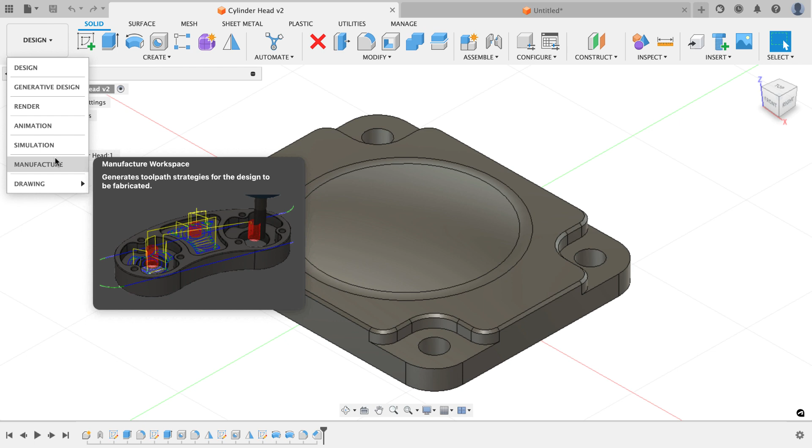I'm going to switch over to the manufacture environment. When I originally did this series, I uploaded a tool library for all the parts in the series. I'm gonna attach a new tool library to the description of this video, which is just a link to the OneDrive folder that I'm using. And I made a small tweak to one tool.

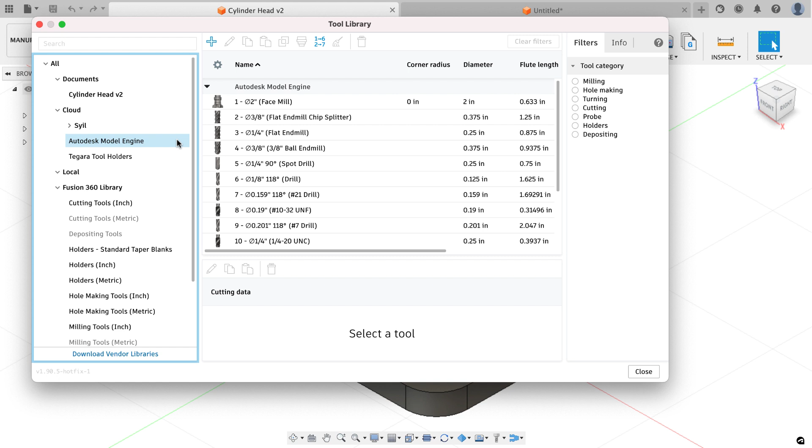Now, you can either download the new tool library, or if you wanna make the change too, what I did is I went to my tool library, and for my Autodesk Model Engine, I found my 3/8 inch end mill, and I changed the aluminum finishing toolpath. So if I edit the tool and go to the cutting data tab, if you find the feed per tooth for aluminum finishing, I changed the feed per tooth from 3 thou per tooth to 0.002 inch per tooth, which changed the feed rate from 60 down to 40.

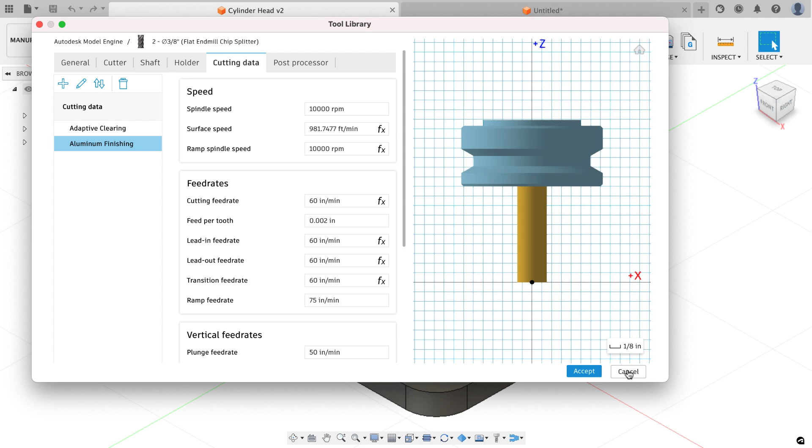I just wanted to slow the tool down a little bit to help improve the surface finish on my 2D contouring operations. So that's the change I made. You can either download the library or edit this tool and make that same change if you're interested in following along with what I'm doing. I'm gonna hit cancel and close, and now I'm ready to start adding my setup for this part.

I'm gonna make this part out of the same stock. It's gonna be roughly 2.5 inches in the X, 2 inches in the Y, and it's 1 inch thick. And when I create my setup, I'm happy with the work coordinate system, I'm gonna leave it at the top dead center of the part. It already found the body that I wanna model. What I'm gonna do now is move on to my stock tab.

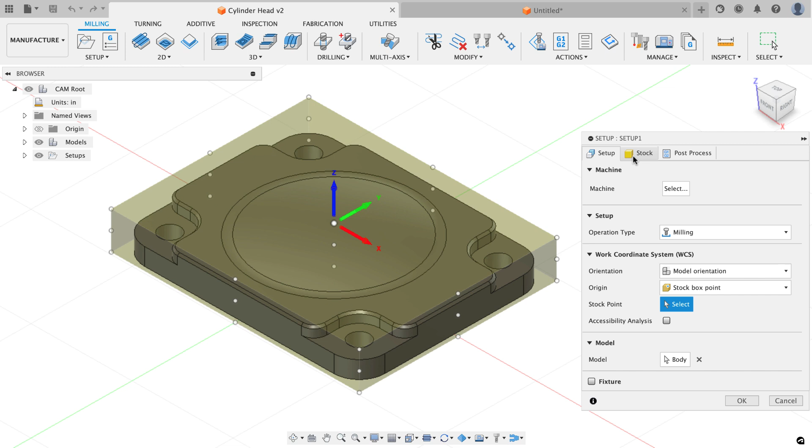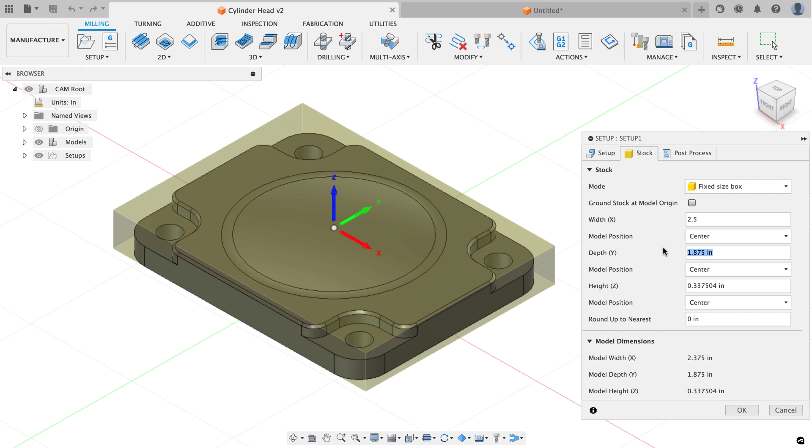On stock, I'm gonna change my mode from relative to fixed size box, and note that I have no additional round up. Here I have that set to 0. So that tells me that my part is only 0.337504 inches in thickness, and I'm cutting this out of a 1 inch piece of material. So let me add my sizes. I'll say 2.5 for X, 2 in Y, and for the Z, 1 inch in thickness.

When I look at this from the front, you can see I've got a lot of material to remove, and I could split the difference, or in my vise, I have gripper jaws that hold the material extremely securely. So in the first operation I'd like to remove as much material as possible, so that when I flip it over and put it against parallels in the smooth side of the jaws, where I'm not holding it as securely, I don't have as much material to take off in that setup.

So I'm gonna adjust my Z model position. Normally you see me do this from the top with a 10 or 20 thou offset. In this case, I'm gonna do it from the bottom, and Fusion figures out the exact number to keep the part centered. On my gripper jaws, I need about 1/8 of an inch of clearance between the shelf the part sits on and the top of the gripper jaw, but I'll give myself a buffer and say 0.2 inches. That's what I'll take off in my second operation, and the shear hog will handle 0.2 inches no problem. So I'm happy with that.

I'm ready to look at my post-processor tab, and there I have my work coordinate system set to 1 by default, which gives me a G54 out in the machine. So I'll hit OK, and I'm ready to start adding toolpaths.

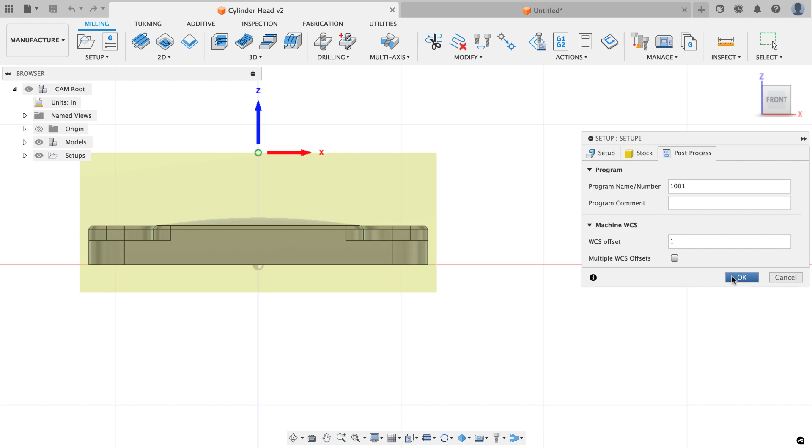So I've applied the CAM toolpaths, I have run the part at this point, and I went back and started editing the CAM video and the machining video, and I realized after running the part that I made some mistakes. I was going to go through and point out some of those mistakes, but I thought it might be a fun game. Who can go through and spot the mistakes that I made?

I'll tell you one of the mistakes that you might notice is for this spiral toolpath right here. I programmed this entire part but didn't save it. Later on, an application on my computer crashed and it took out Fusion as well, and when I opened the file back up, all my toolpaths were gone, but the video footage was recorded. So I went through and quickly reduplicated everything and did setup 2 and 4 after that.

However, when I applied the spiral toolpath, if you note in the video, on the fourth setup, if you look at my spiral, it goes from the inside out, which would be bad. But if you followed along the steps that I did for the first setup, it's going to go outside in, which is what you want. So that's an example. I'm curious to see what other things you guys can spot as you watch the CAM and then the machining video.

I now return you to your scheduled CAM broadcast.

One of the things I often see people do with parts like this is they just go with the de facto, I'm going to face the part. And I don't see any reason to face this part because there's no flat face at the top of the part anyway. We got the dome shape. If we face this part, we're only going to take a few thousandths off and we have a long ways to go till we get to the finished part face. So instead, I'm just going to rough the whole part out by going to the 3D menu and selecting adaptive clearing.

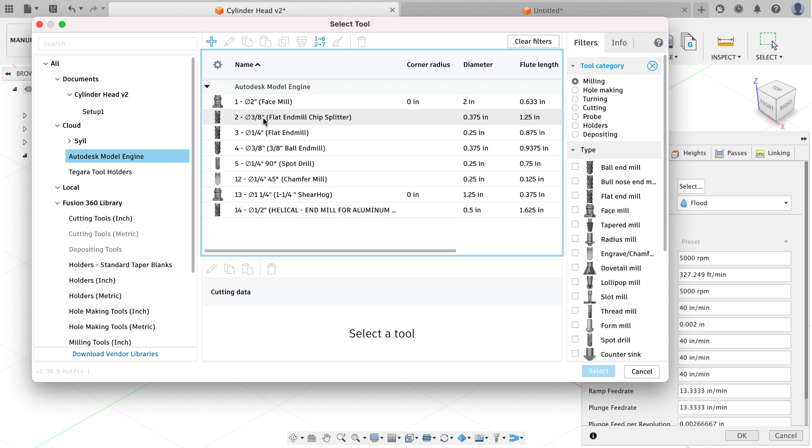I'm going to grab a tool from my library, and the tool I'm going to use is the one that I just modified, tool number 2, the 3/8 inch end mill, and I want to select the adaptive clearing preset. For my geometry, if you remember in my last video, I talked about nothing means everything. I'm not going to select anything for geometry. I'm going to let Fusion figure it out. Fusion knows what the stock is, the model, and the tool, at least for 3D operations, and it's going to be able to figure out what I want to machine. I'll move on to my heights tab.

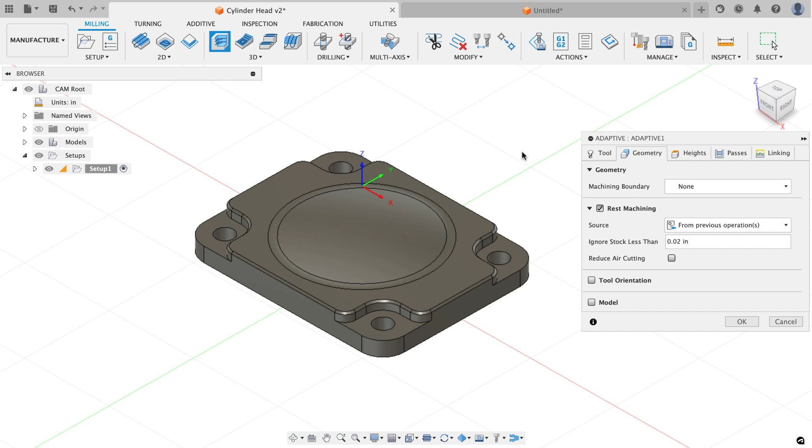On my heights tab, I'm going to start cutting from the top height of stock top, and I'm going to cut all the way down to the model bottom, but I want to go 20 thousandths of an inch past the bottom of the model for when I flip it over so I don't have any height mismatch. Instead of typing 20 thousandths here though, I'm going to type in minus 0.03. And you'll see in a second why I decided to make that change of 30 thousandths when I told you I only want to go 20 thousandths past the bottom.

I'm going to move on to the passes. I'm happy with the optimal load. I could probably increase the percentage of step over based on watching it cut the cylinder now. That was the first time I'd ever used this tool, so I was a little on the conservative side. But it's going to go pretty quick. It's a pretty small part, and I think I'm going to leave that optimal load right where it is.

If I move down to my maximum roughing step down, the tool is going to need to go roughly 0.82 inches deep to machine what I've asked for, and that's a little outside the 2 times diameter rule that I go for. We might be able to make it work, but I'm just going to split the difference a little bit, and set my maximum roughing step down to be 0.42. I just want 2 step downs in this part.

When it roughs this dome, it's going to leave kind of a terraced effect on it, and for the terrace I just want to make this a little bit smaller, so I'll say 0.03, and that'll just leave a little bit smaller notches for the ball mill to come and clean up. Do a couple more things. I'm going to turn on something called order by area.

I want the tool to do all the work it can in one spot before it moves somewhere else in the part if possible. And then I want to leave some radial and axial stock. I'm going to set my radial to be 0.01. And when I do, you'll notice that the axial follows along at the same time. This is why I went 30 thousandths of an inch below the bottom of my part, because I'm asking the tool to pull up 10 thousandths of an inch everywhere, including on the outside boundary of the part.

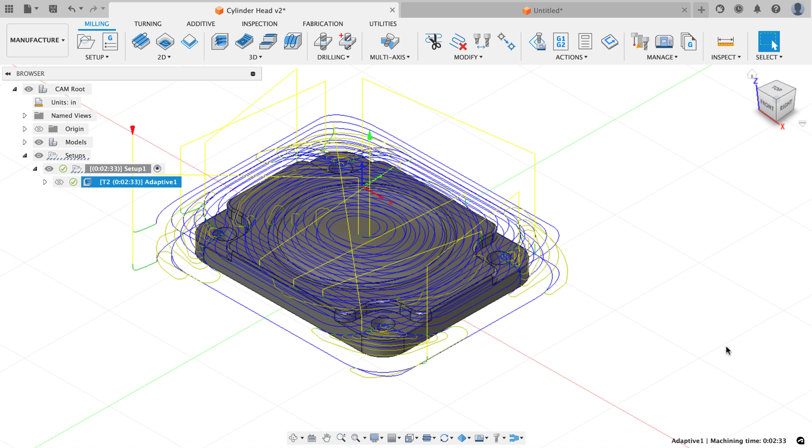And the thing I'm looking for is I just want 2 step downs. I don't want to see 2 small step downs at the very bottom of the part. I just want to see 2 primary step downs. If I go and I simulate this, I'll make this go just a little bit faster. We'll see that it just starts decking off that bit of material from the outside in, and then it's going to step down and rough out the rest of the part.

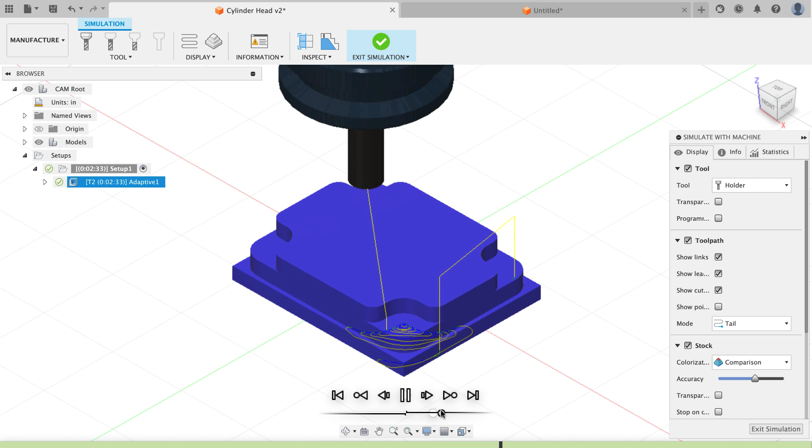We're looking at a cycle time of roughly 2.5 minutes. When we do the video, you guys will have to pay attention to how close that estimate actually is for what it's doing. And now it's doing the little step ups. It's going to take that material off, and you'll start to see it work on the dome and removing material so that the ball mill doesn't have quite so much that it has to remove. So there's what my part's going to look like when it's done with the roughing operation. I'm happy with that. I'm going to exit my simulation.

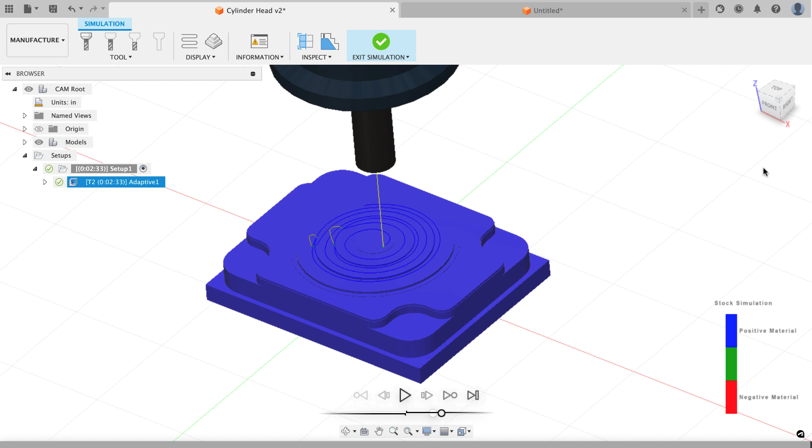And now what I think I'd like to do is add a finishing pass around the outside perimeter of the part. To do that, I'm going to select 2D contour. I'm going to use the same end mill, but I'm going to use the finishing profile that I chose. Instead of going and selecting the tool and choosing it, notice that there's a preset field right here that I can drop down, and I'll say aluminum finishing, and I get my 2,000 feet per minute and my 60 inches a minute.

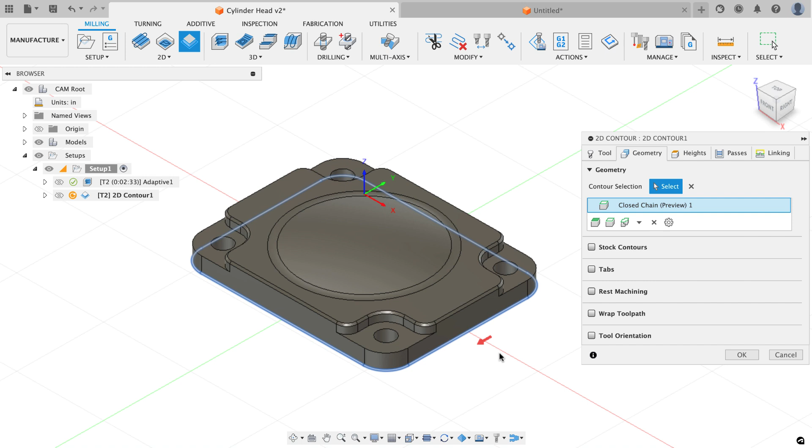For my geometry, I just want to grab the chain of geometry at the very bottom of the part. And for my heights, I'm going to cut down to the selected contours, and I'm going to go negative 0.015. I won't go quite as deep, just by a little less, and that'll cut past the bottom of the part and finish that entire face. On the passes tab, I think I'm happy with everything here. I have my finishing overlap already set. I have my feed rates.

I'm good with that. On the linking tab, I'm gonna set my lead and sweep angle to 0, just like I did on the cylinder. I'm gonna uncheck use same as lead in for the lead out, and I'm gonna lead out at a 45-degree angle. And then I'm gonna choose my preferred lead in position, and I'm gonna use that same point that I did in the cylinder. So a lot of this is the exact same as what I grabbed in that cylinder. In fact, I could have probably opened that part and copied the toolpath off and just pasted it on here. I'll hit OK. And now I get a 2D contour that just cleans the outside perimeter of the part.

I left material on all the flat faces, and I could certainly go around with 2D contours or 2D pockets and do those faces one by one, but there's a more automated tool for that, and the tool I'm going to use for this is going to be 3D flat. Again, I'm going to use the same tool to do that. I'm going to choose the aluminum finishing toolpath for this, and now I just want to go over to my geometry tab, and what this tool does is it automatically finds any face that's horizontal and automatically machines it.

So that's going to be the top face and any of these pocket faces down here. It's not going to go any lower below the part because there's no flat faces down there, which means in the heights tab, I'm completely fine with it cutting from the stock top to the model bottom because it's only going to find horizontal faces. So I don't have to worry about it crashing into my vise or anything like that.

And then I'm also going to tell Fusion it's okay to machine over holes so it doesn't try to lift up over the holes it sees on these flat faces. So I think I'm okay with all the options that are there. The final option I'm going to do on the linking is to tell Fusion to do a minimum retraction. Just lift up as high as you need to, or as best you can so that you don't crash into anything. I'll hit OK. And now what we'll see is without selecting anything, Fusion will go and machine all the flat faces on this. Now there is a problem.

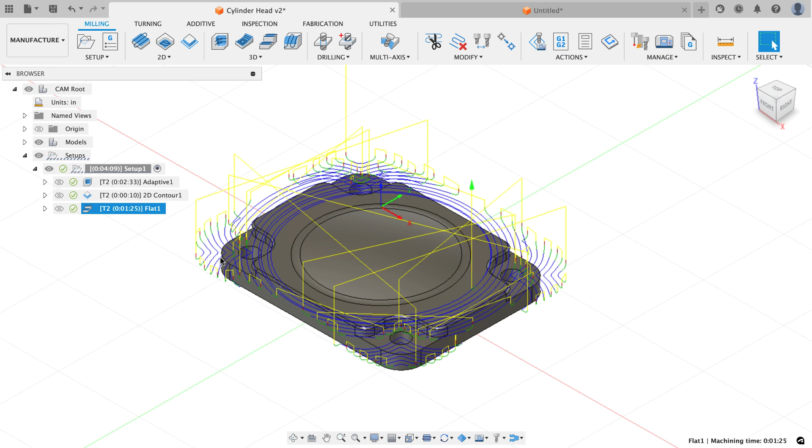It's using the finishing step over amount, which is way too small. So let me edit that. I'm just going to go over to the passes tab, and there's where my step over value is. If I want, I could just go and say reset to system default, and that's what it would have chosen if I didn't have a preset already set for this tool. I'll hit OK, and now we'll see a new toolpath that has much larger step overs calculated, and it should appear on our part much faster.

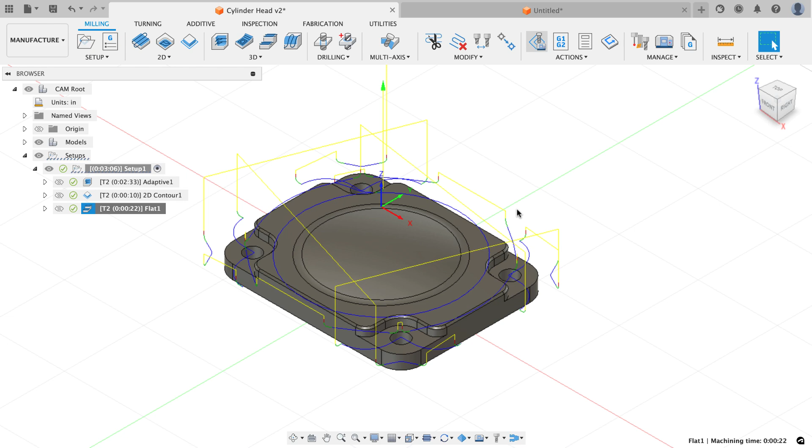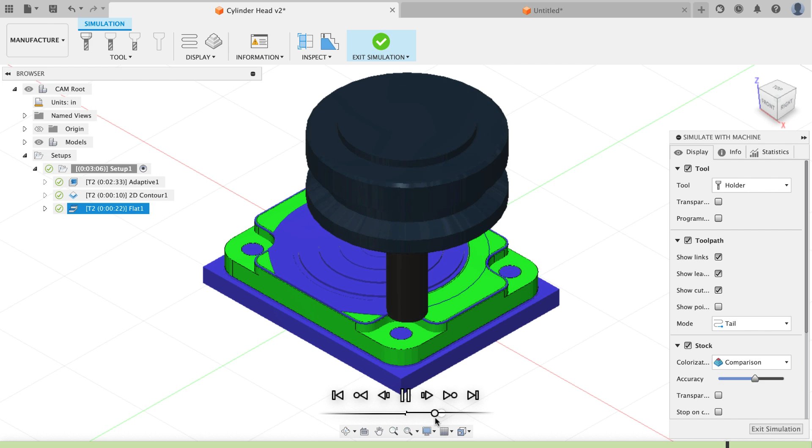I'm going to simulate this just to see what we get. Remember, anything that's blue is remaining stock, anything that's green is finished part. And if we slow this down a little bit, you can see it's just doing a cleanup pass across each one of those faces. Now it's going to step up on the top and cut across. It'll cut across, and then now it's going to go back the other way and just finish that top surface, and the flat toolpath is done.

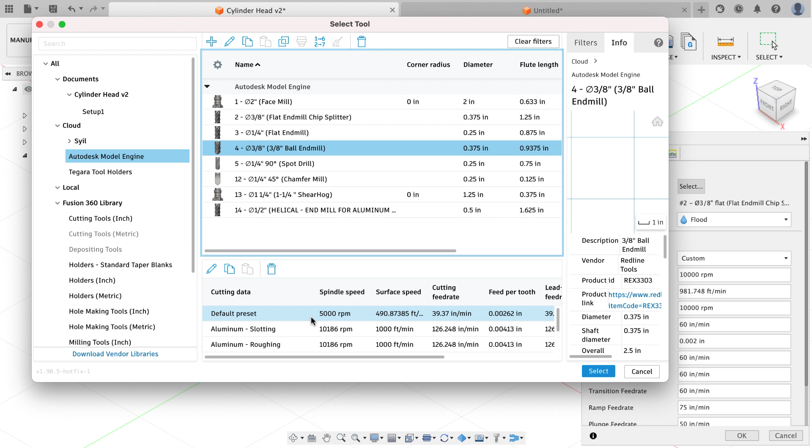I'm going to do a 3D surfacing toolpath to do this dome. And that toolpath is going to be from the 3D menu, the spiral toolpath. I'm going to grab a new tool out of the library, and this time I'm going to grab tool number 4, which is a 3/8 inch ball end mill. And I'm going to grab the aluminum finishing preset and select that. You can see that this is going to run at 10,186 RPM. That's a bit of an issue for a lot of the machines that I see that don't go over 10,000. I can go up to 12, so I'll be okay with 10,186.

But I think I want to make one adjustment. It's cutting at 159 inches a minute. I'm going to change the feed per tooth down to 0.003. When I do that, you can see it'll change my cutting feed rate to roughly 90 inches a minute, which should hopefully give me a better surface finish on the part.

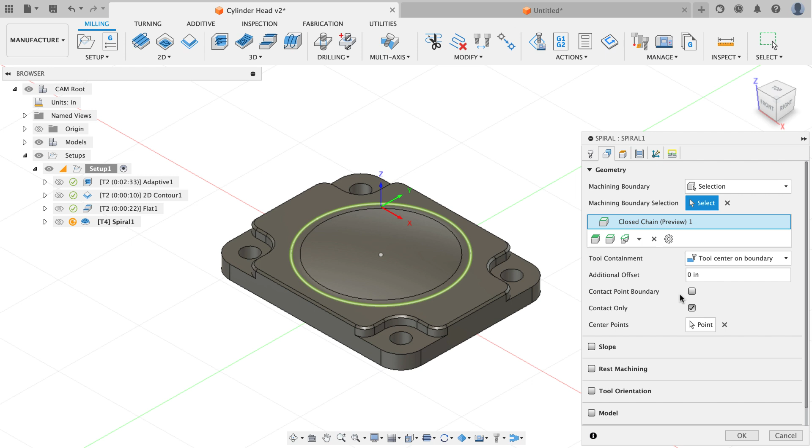I'm gonna move to the geometry tab. It's asking me for the center point that it wants to do the spiral around. I'm just gonna click on that circle right there, and you can see the white point that designates where the center is. For the machining boundary, I'm gonna say I wanna do a selection, and I'll choose this edge, and I want the tool center to be on the boundary. I'm gonna turn on contact point boundary as well, so the tool gets all the way out there.

And now I'm gonna go to the passes tab. I'm gonna look at the direction it's cutting, so it's gonna do shortest machining path. What I wanna do is outside to in. I've got the outside finished, I want it to work into the center, so I'm just gonna force it to go outside in. It's gonna do a spiral, and I'm gonna set my step over to be 0.01.

I wanna keep this toolpath within 2 or 3 minutes. I don't need a super great finish on this, but I also want it to look somewhat nice. Gonna keep going down and looking. I think I'm happy with everything else that's on this option.

And the last thing I'm gonna do is go to the linking. I'm just gonna change the retraction policy to be a minimum retraction, and I'll hit OK. And we'll see the toolpath, rotate around and look at it. It looks pretty good. Did anybody else catch an issue?

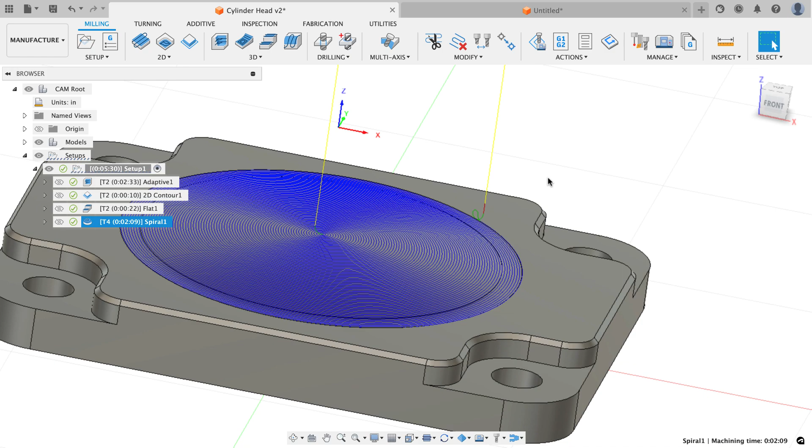I don't want this if I'm going to machine this part. I don't want to have this kind of figure 8 move here. And I'm guessing I know what this is. It's either we need to change the tolerance of the model, or I'm going to try to change the tolerance of the additional offset by doing minus tolerance.

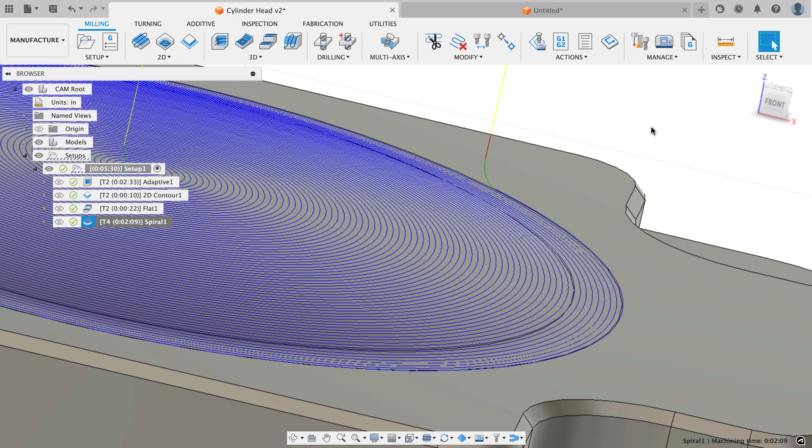And now I'm gonna hit OK. Let's take a look if it cleaned it up. And now I can see that, yeah, I get a nice arc in. I'm happy with that. And that's going to machine that dome complete. I'm ready to go and drill some holes now.

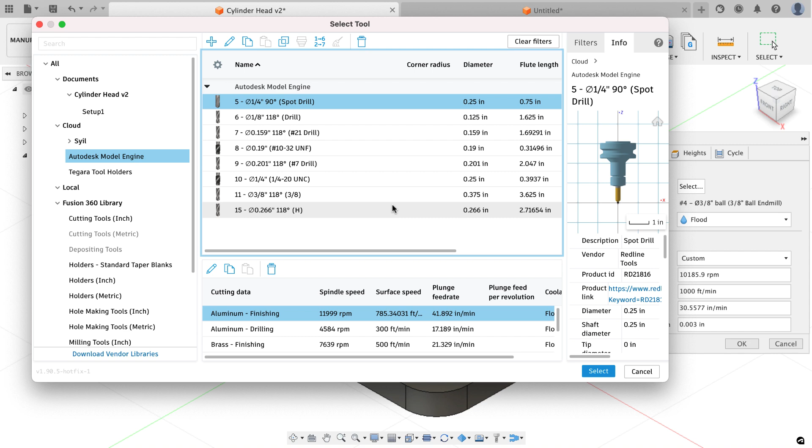So I'm gonna grab a drilling operation. I'm gonna spot drill this first by going to my Autodesk Model Engine project, and I'll grab tool number 5, which is my 1/4 inch spot drill. And I'm gonna choose aluminum drilling as the preset. And I'll just go grab the faces that I wanna machine.

I could have used select same diameter, which would have saved me some time. Not sure why I didn't use that there, but I could have just checked that box and it would have grabbed everything automatically for me. I think I'm gonna put that on. It leads in a slightly better place that I'd like it to, in the front where I can see everything better for the first operation. So I'm gonna turn on select same diameter and let it grab those.

On the heights, I'm gonna cut from the hole top for the top height, and for the bottom height, I'm also gonna go to the hole top, and I'm gonna do a minus 0.05. Now, when I'm programming things for myself and I'm not trying to do it in video form, I have some templates saved for this, so that these values are already set for me, so I don't have to go through and change these, which saves me time.

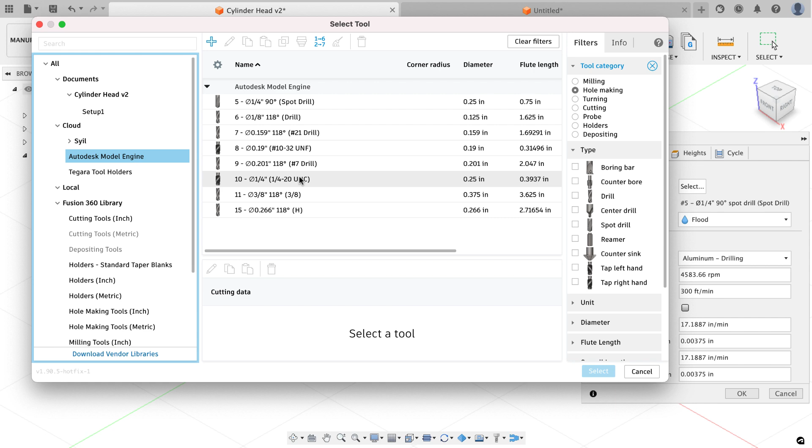On the cycle tab, drilling rapid out is gonna be just fine, and I'll hit OK, and there's my spot drill. I'm gonna do another drilling operation. I'm gonna select my tool, and if I hit cancel here, remember if I hover over a hole, it'll tell me that that's a 0.201 diameter hole. I'm gonna select a tool out of the library, and I'm gonna go find my 0.201 drill, which is tool number 9. Aluminum drilling is selected.

I'm going to select that. I'm going to go to my geometry. I'm going to click on one of the holes and say select same diameter. And I'm going to check something. We might be able to come back and make this drilling toolpath a little more efficient, but I have to pay more attention to the previous toolpath where it started and ended.

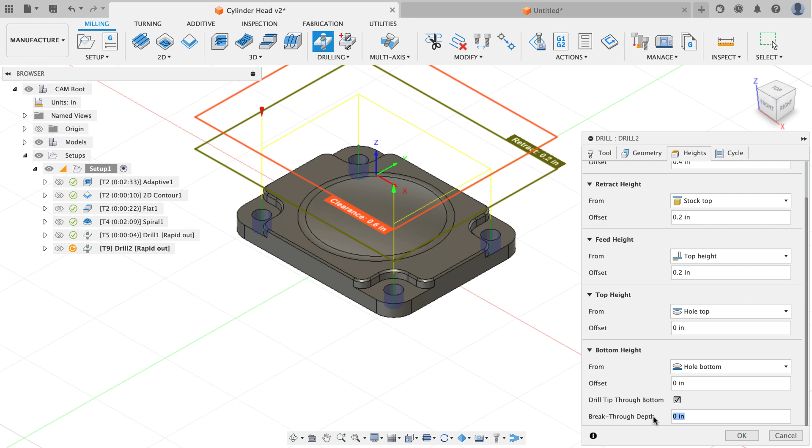On the heights tab, I want to cut from the hole top to the hole bottom. I want it to go all the way through, so I'm going to just say drill tip through bottom, and I'm going to cut past by 50 thousandths of an inch. On the cycle tab, I'm going to do chip breaking, partial retract, and I'll hit OK. And you can see it's leading in on this hole and then working around clockwise. If I go to the previous hole, you can see it's doing the exact same order.

So what I can do with this, I'm going to go edit it. I'm going to go to the geometry tab, and I'm going to tell it that I'd like to reverse the order. I want it to start where it just ended. So now it's going to end in this hole, and then it's going to start in this hole and go counterclockwise for the next set of holes. So that takes care of my drilling, and all I have left to do now is add some chamfers.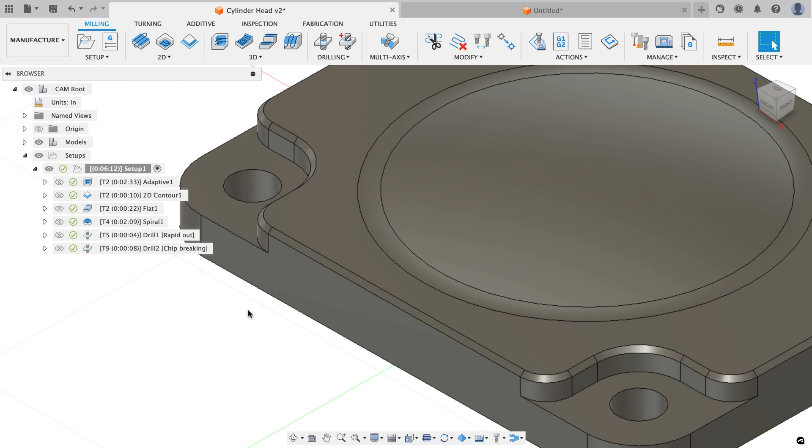The chamfer on this part has been modeled, and so I'm going to use 2D contour to add this chamfer to the top of the part. You can use 2D chamfer to do it, but it requires you to understand more about how the toolpath works, so I'm just going to use 2D contour to do this instead.

From the 2D menu, I'm going to select 2D contour, and I'm going to go to my library and grab tool number 12, which is my 45-degree chamfer mill. And I'll hit select. For the geometry, I want to choose this chain of geometry at the very bottom of the chamfer.

And now I can move right over to the passes. I don't need to worry about heights. Everything is being dictated by the tip of the tool and the geometry that we set. Fusion has detected that we're using a chamfer tool and wants to know what the chamfer width is. If the chamfer's been modeled on your part, you can leave this value set to 0.

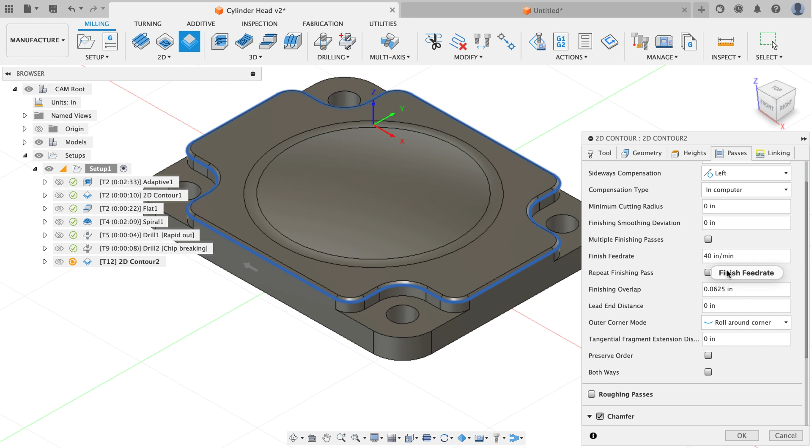For the chamfer tip offset, it's asking me how far do I want to offset the tool past the bottom of the part. And I'm going to try 60,000ths of an inch and see how close that gets me to hitting the floor. That's my determining factor. I don't want to cut into the floor below the chamfer. I'd like to cut down as far on the slope of the tool as I can to get towards the top where I get a better surface footage where I'm going to get a better cut. I should also note that because I'm using 2D contour, my finishing overlap is already set.

I'm going to go to my linking and one more time, I'm going to set my lead in sweep angle to 0, my lead out sweep angle to 45, and my preferred entry position to this point right here. Again, I have templates set up for this, so I don't have to go through and change all those numbers. I have templates set up that have the proper lead in and lead out angles for doing operations like this. I'll hit OK and we'll take a look and see what we get.

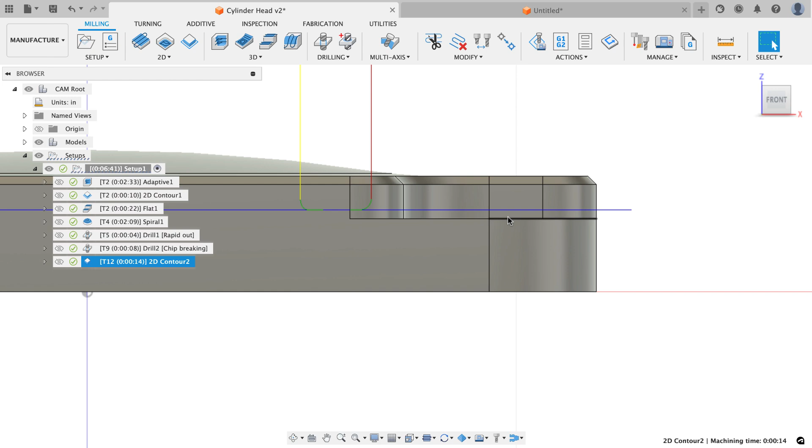That toolpath looks fine. What I want to make sure is I'm not getting too close to that floor and it looks like I have plenty of room there. So that's just going to go around and cut that 20,000ths of an inch chamfer. We'll chamfer the holes around the part, so I'm going to do 2D chamfer for this. Same tool. The geometry, I'm going to click on my 4 edges starting with that hole right there because that's closest to where it finished for the 2D contour for the last operation I did.

On the passes tab again, one of the things I'm going to do is turn on preserve order so that it machines the selections in the same order that I selected them in when I clicked on those edges. I'm going to go down to the chamfer width. I'm just going to do a 10,000ths of an inch chamfer, a 40,000ths tip offset, it's going to be fine. And I'm going to set this to be 0.001, and we're going to see in the very next toolpath exactly what this controls. On the linking tab, I shouldn't have anything to do. I'll just hit OK. And now I get a chamfer toolpath that goes and does my 4 holes.

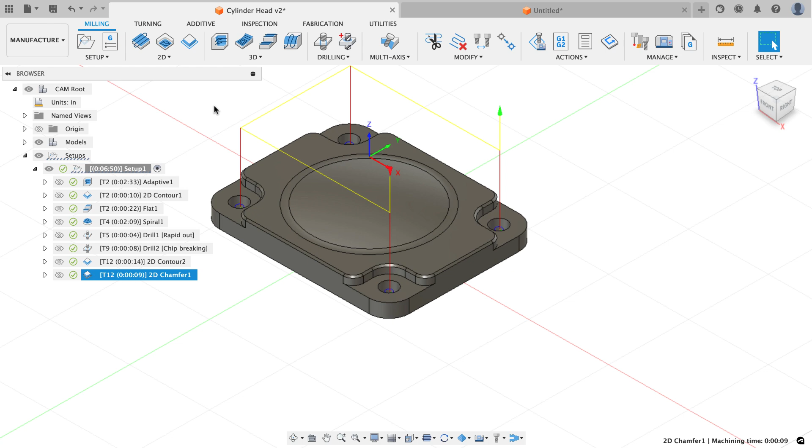For the last toolpath, I'm going to select 2D chamfer, same tool. And for this, I'm going to select my same 4 edges. So I'm going to select this edge, this edge, this edge, and this edge. I'm going to go to the passes tab. Now for this, I want a 20,000ths of an inch chamfer. And my chamfer tip offset, we're going to talk in a second about how I calculate that. I'm going to set this to be 0.075 for this particular instance. And I'm going to set my chamfer clearance to 0.001. This number is going to come into play in a big way on this toolpath that I'm adding.

I'm also going to tell Fusion I want to preserve the order so it starts in this corner so I can watch it really nice in the first one and then it'll go around and do the other 3. No other changes needed on my linking tab, so I'm going to hit OK. And we're going to take a look at another little drawing I have, and then we're going to come back and talk about that chamfer that I just created.

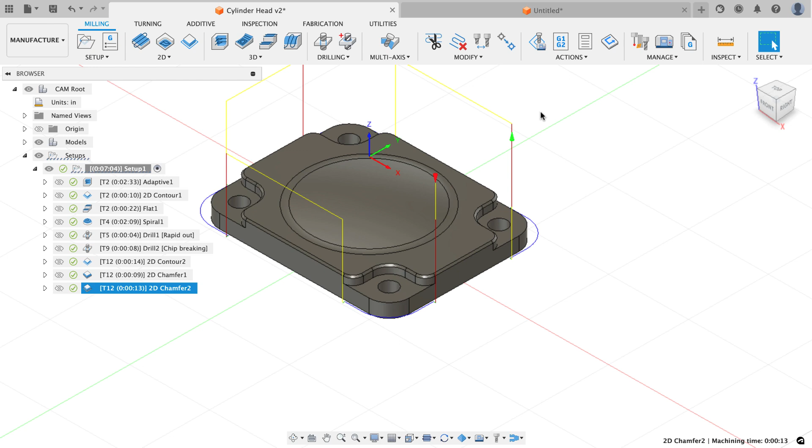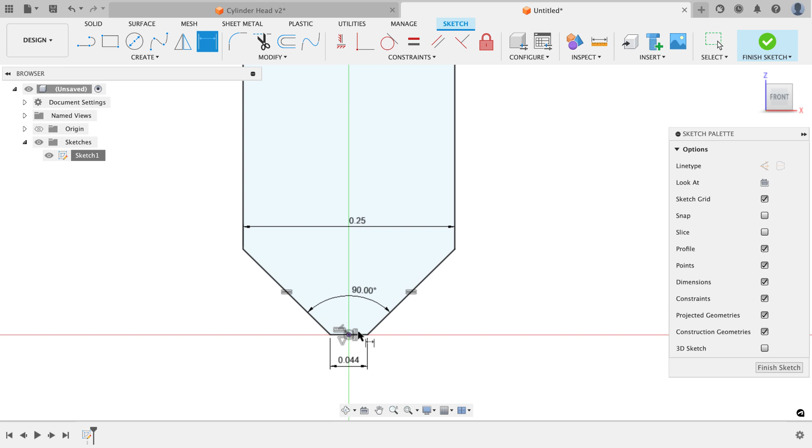So here's a sketch of my chamfer tool. It's a 1/4 inch in diameter. It's 90-degree included angle, so 45 degrees per side. And the tip of this tool is 0.044. I left off a dimension, so let's just edit the sketch quick. What that means is if I do a dimension from the bottom face to this edge, the deepest I can go with this tool before I cut past the shoulder is 0.103.

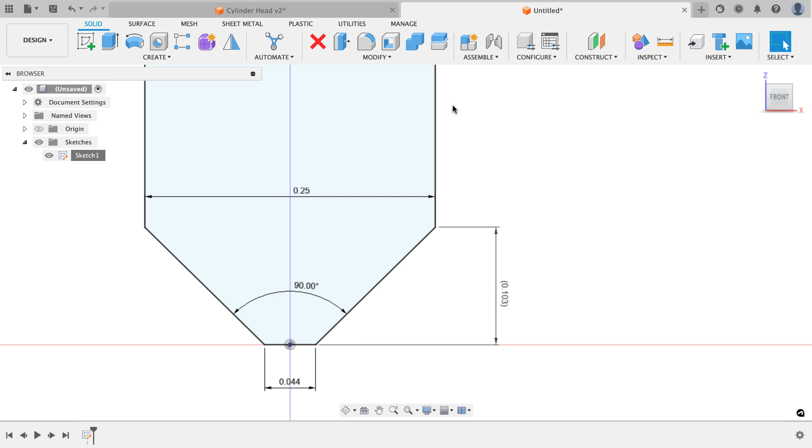The chamfer that I'm asked to do: 0.103 minus 0.02. That tells me the deepest I can go with this tool without cutting past this edge is 0.083. I chose 0.075, which is getting me really close to the tip of where this intersection is right there. So now that we know how I calculated that, let's go back and talk about those fields.

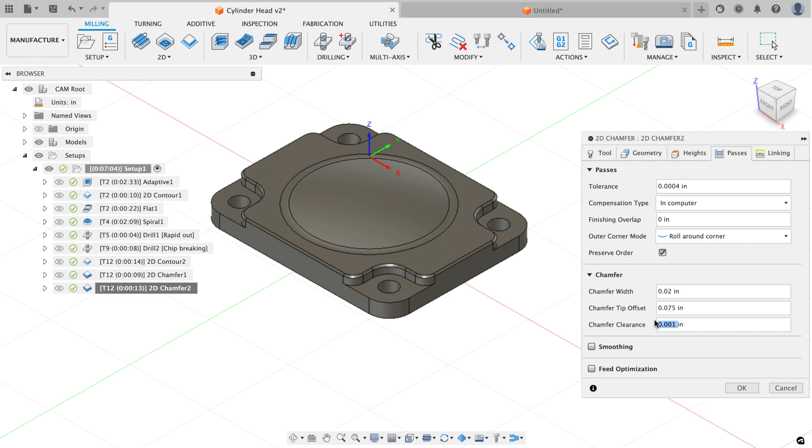If I edit this and I go to the passes tab, this chamfer clearance is going to keep the tool, the vertical part of the tool, the shank of the tool, from running into this vertical wall by 1/1000th of an inch. A lot of times that makes people uncomfortable, but if you think about it, when you buy tools, they're almost exactly on size. So this is a 1/4 inch tool. I would bet that it's always going to be a 1/4 inch or less, maybe a little bit less depending on the rod stock that they're using to create this chamfer tool. So I'm gonna be okay with that. I'm good with my first setup.

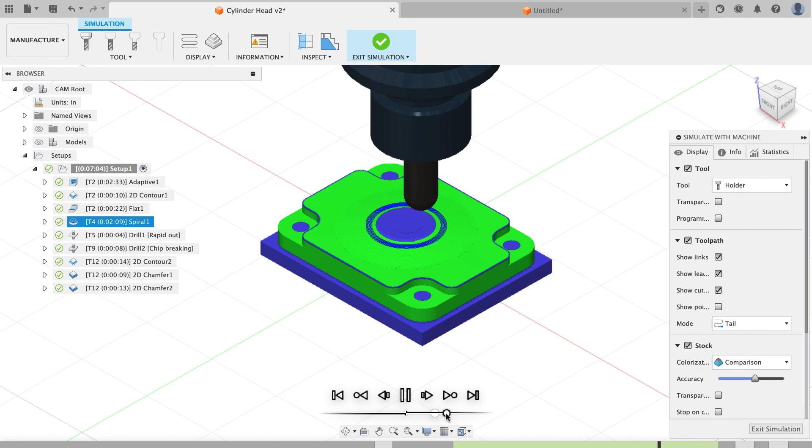Let me turn off the model, and what I want to do is just go simulate this with the model off. Now whatever I see is what I'm going to get, and I might let this go a little bit faster on the adaptive since we've already watched that play one time, and then we'll pick it up maybe from the flat on. So there comes my flat. It's doing its thing. We're going to see the spiral. I'll make this go a little bit faster so we don't have to wait for the whole thing. When the spiral is done, it's going to spot drill the 4 holes. So that's good. I'll slow down just a little bit now.

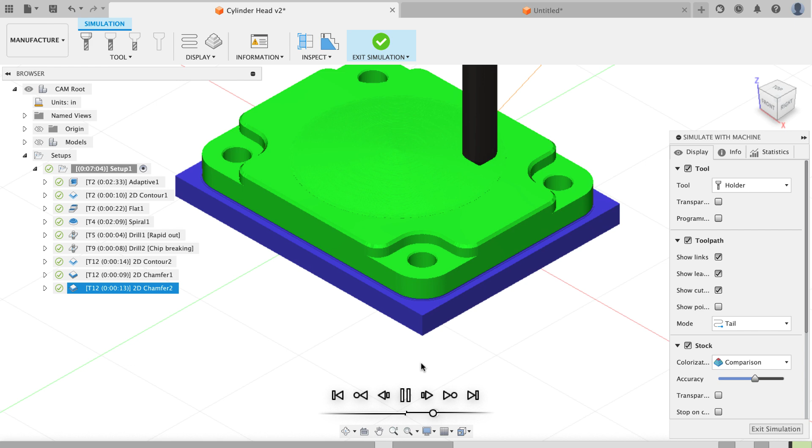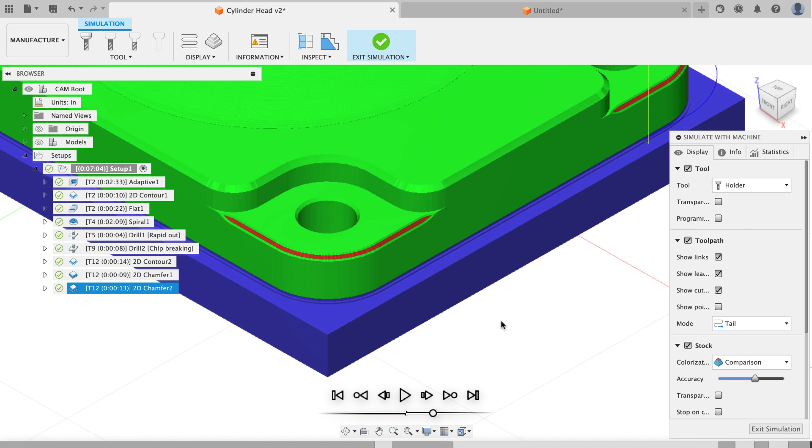So we're going to come spot, spot, spot, spot, drill, drill, drill, drill, reverse direction, and it's doing the chamfers and does the other chamfers. And now here comes the magic chamfer after it does this last hole. The reason I call it the magic chamfer is this stops you from having to deburr that edge. You can see how close we actually get, and it stops the tool before it runs into the vertical wall, so it deburrs as much of that edge as possible without me having to take a hand deburr and do that, which I'm never going to make look as nice as the machine does. So that's why I left the chamfer off when I modeled this part, because it's just easier for me to do it in CAM and get the same result. So this is what our part is going to look like at the conclusion of the first setup.

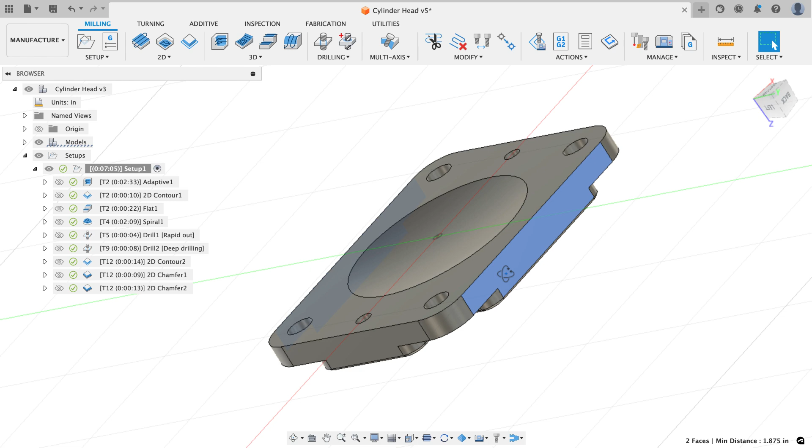And now I can go get ready to set this part up for the second operation and get rid of that hat of material. For the second setup, I'm going to flip the part left to right. So I'm just going to rotate this around, keeping the front to the front, and the left is going to become the right, and the right will become the left. Now, when I put this in the vise, I'm going to clamp on this face and this face. That's what the vise is going to clamp on. And then this face is going to rest on the parallels. So I want to put my work coordinate system at the center of the part, at the center of that face right there.

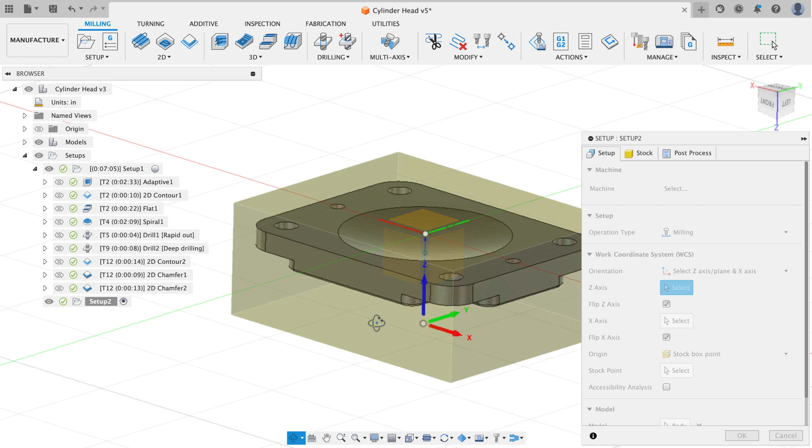So I'm going to go and create a setup. And you can see my Z is going the wrong direction, so I'll just click on the Z arrowhead, and the X is going the wrong direction, so I'll click on the X arrowhead, and now I'm happy with that. I'm currently located on the stock box point, and what I want to be is on a selected point, not a model point. A model point would be the tip of the dome. I want to be on a selected point, and I'm going to select that circle right there. Now if I look at that, I'm right on that face I was talking about at the exact center of the part. So I'm happy with that, and I'm ready to move on to the stock tab. I'm going to choose from preceding setup and continue rest machining so the stock looks the same as it does after op 1, and I can hit OK.

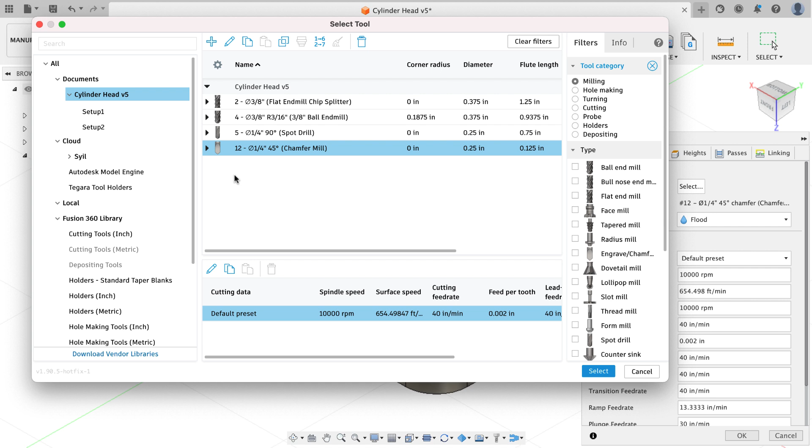All I have to do in this particular setup is rough off the majority of the hat and then just do a facing tool pass. So I'm going to start out by doing a 3D adaptive clearing. I'm going to go select a tool out of my library, and it's going to be the Autodesk Model Engine library. It's going to be tool 13, although before I post this, I'm going to change this to be tool 10. On the geometry tab, I'm not going to make any selections. I'm going to say none, let Fusion figure it out. But on the heights, I don't want to cut all the way down to the model bottom. I want to cut to the model top. My goal in this operation is just to remove the hat of material so I can more accurately touch off on the machined faces of the part for the next setup.

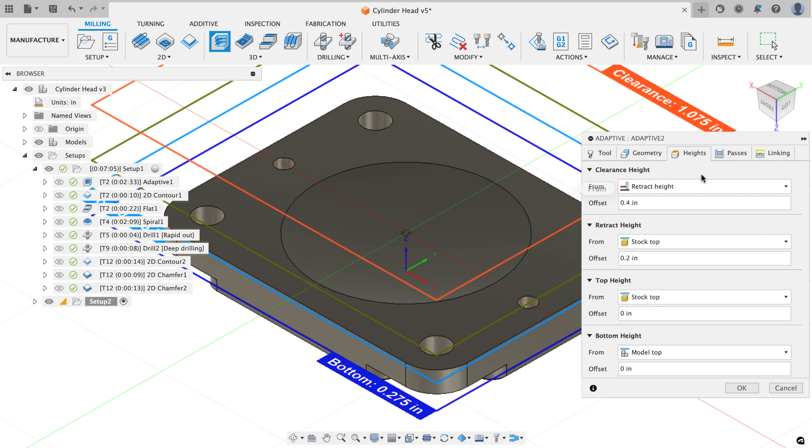On the passes tab, I'm pretty good with the 0.2 step over and the 0.2 step down. All I really need to do is set my radial stock to leave to be minus 0.05 because I want to cut outside the bounds of the part on the wall stock, but I want to leave some floor stock, which is axial stock, of positive 0.01.

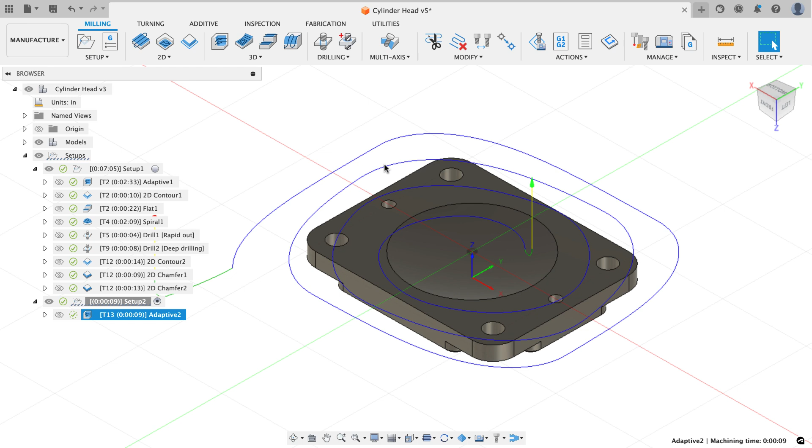I'm going to turn smoothing on, and then in the linking tab, I shouldn't really need to worry about it, but I'll do a minimum retraction. I'm going to set my stay-down level to 80% and my no engagement feed rate to 400. I don't expect this tool to lift at all, but in case it does, that's why I set those numbers. And now I can hit OK, and we should just see a spiraling toolpath that roughs off that material.

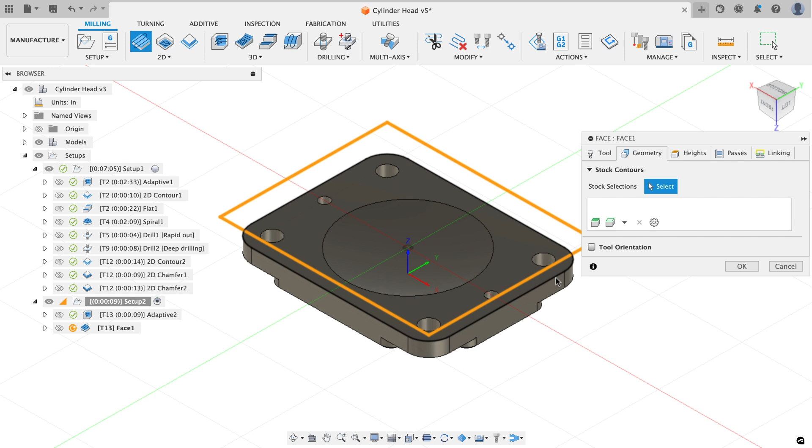The next thing I want to do is a facing toolpath using the same tool. I'm going to make one change on the tool tab. I don't want to cut at 200 inches a minute. I'm going to change my feed per tooth to be 0.005. That's going to halve it down to 100 inches a minute to give me a slightly better surface finish. On the geometry, I'd be okay hitting OK now, but really the only stock I have is exactly on the top face. So I'm going to click on the top face of my part to tell Fusion that's the only place it has to worry about stock being.

Then I can jump over to the passes tab. I'm going to increase my step over to 1 inch. I could go a little bit more if I wanted to, but 1 inch should be enough. And I'm just going to put a small 0.2 inch stock offset here to make sure it gets past the sides of the part. I only want a climb cut for this, so I'm going to set that to be climb, and everything should be good.

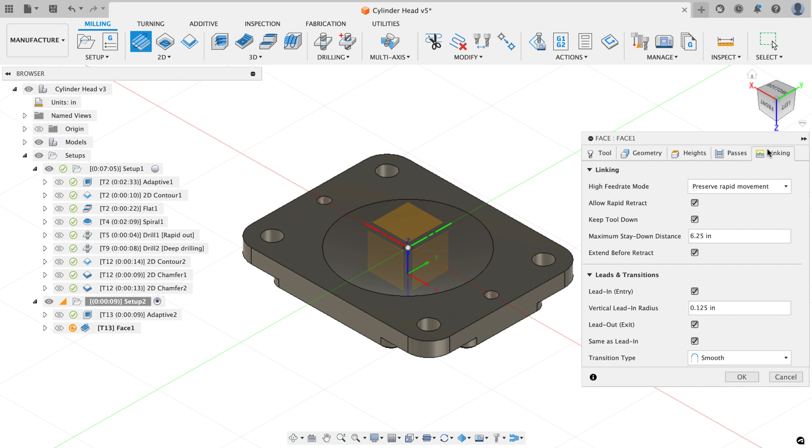I'll look at the linking tab just to make sure extend before retract is on. It is. I'll hit OK, and I should just get a couple passes going across there to take that last 10 thousandths of an inch off. And there we go. I'm done with my second setup. Might be a good idea if I hit save now.

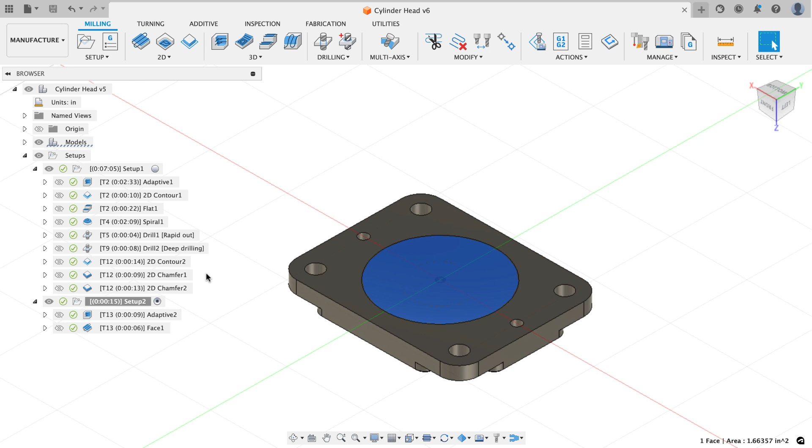For my final setup, it's almost going to be an exact duplicate, except all I have to do is surface this other dome, drill the holes and chamfer my edges, and I'll have this part complete. I'll start one more setup. Again, click on the Z arrowhead to flip it, the X arrowhead to flip it, and I'm going to choose a selected point at the exact same point I was just at for the Z. I lied, I want to do something completely different on this. I want to be on the left face and the back face at the corner. I don't want to be in the center for this part.

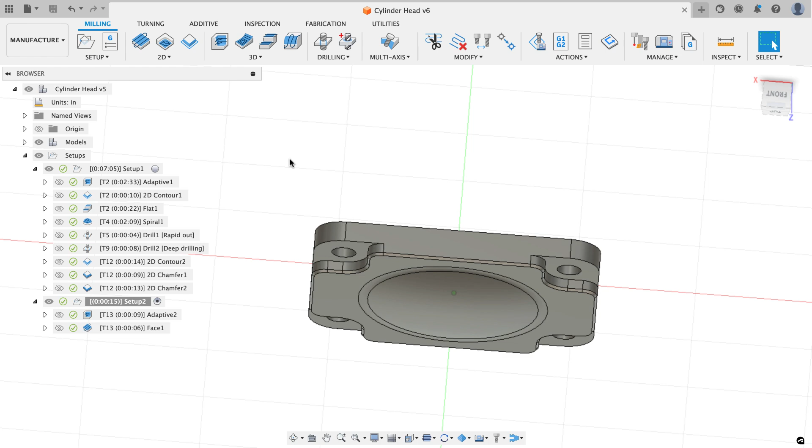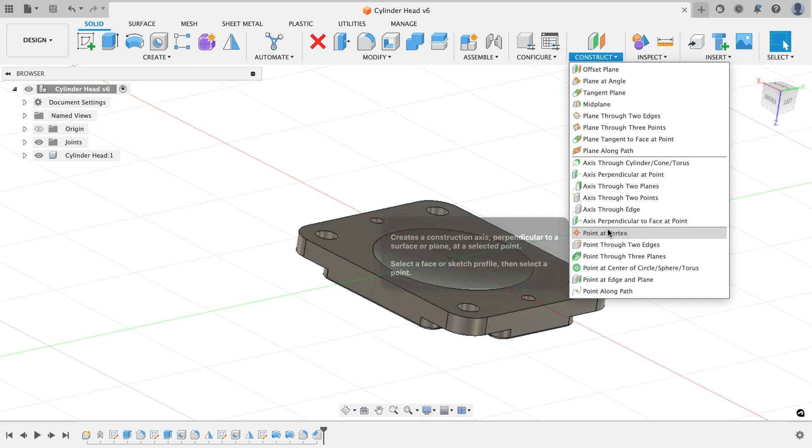So that means I need to go back into CAD and do a little bit of work, because I don't have a point at the intersection of those planes that I can use, but there's a really easy way I can do it. If I come back into Fusion CAD, I want to set this so I know which face I'm on. So my right is going to be on the left for the backside. On the construction drop down, I'm going to choose a point through 3 planes. I want this face, this face, and this face. So now I'm on that same face, but I can touch off on my 2 edges, and now I can hit OK.

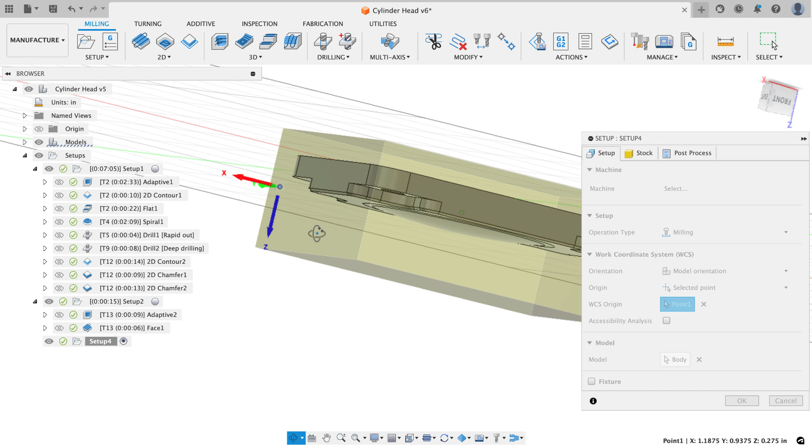I'm going to come back into manufacture. I'm probably going to get setup 4 now since I canceled that one, but that's not the end of the world. I'll just say new setup, and I get setup 4. I can maybe rename that if I want to. I'm going to choose a selected point, the one that I just created. So it's still on the bottom of the part, but it's the X and Y. And I have my X and Z going the wrong direction, so I just click on those 2 arrowheads to get them facing the way I want. Now you can see I'm on that bottom face, but from the top, I'm at the intersection of those 2 faces, so I can use my Haimer to touch X and Y off of those exposed machined faces.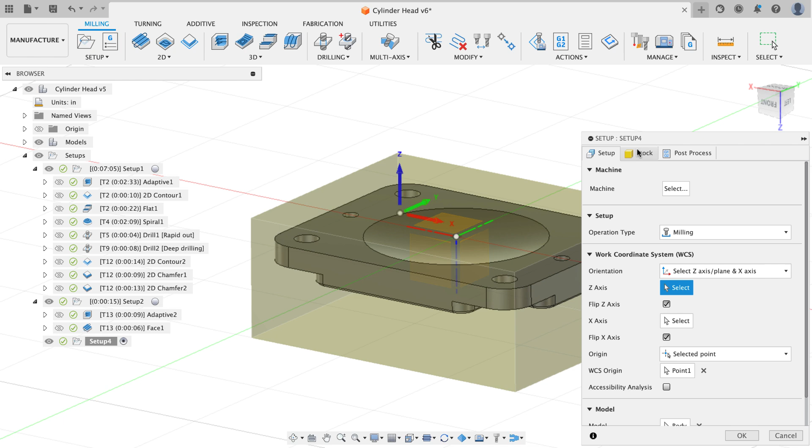On the stock tab, I'm going to say from preceding setup, and I'm going to choose continue rest machining. Post-processor tab, I'm going to use G54 one more time, and I can hit OK. And now I'm ready to finish up that machining on this part.

I'm going to start out by doing this domed cut area, and I've already got my work done. I just have to steal my spiral toolpath, so I'm just going to copy that toolpath and right-click on my new setup and paste it in there. And now that I have that pasted, I can expand this out, grab that spiral toolpath, and then I'll just go and throw some things away.

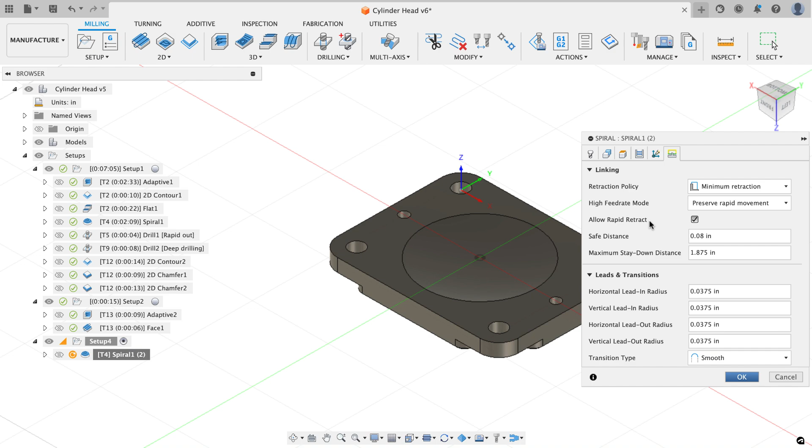So for my center point, it's going to be this edge. For my machining boundary, it's going to be that edge. Everything else about this toolpath is going to be exactly the same. So I can hit OK. It's going to cut from the outside in. And notice I didn't try to rough this. It's only going a 1/16 of an inch deep.

If I switch back to design and I find the sketch that controls the revolves, I could use the measure command and click here to here, and you can see our depth is only a 1/16 of an inch. So we shouldn't need to worry about roughing that material out first.

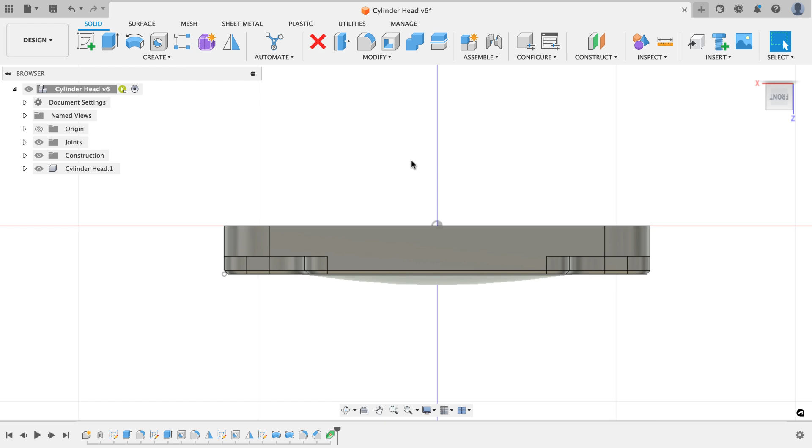I'll come back to manufacture, and all I have to do now is spot drill a couple holes. So I'm going to do a drilling operation. I'm going to select my spot drill from my project. Actually, I can do it from my document because I've used it before. And I want aluminum drilling. And now I'm just going to click on the 2 holes that I want to spot. So I'll just choose that face and that face.

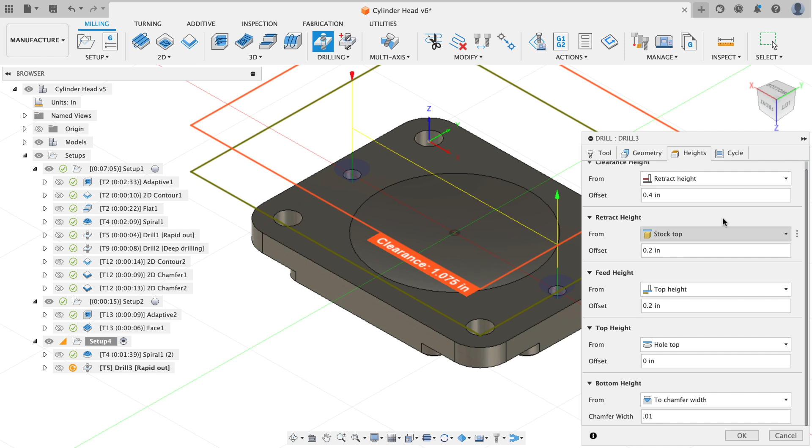On my heights, I'm okay with the hole top, but for the bottom height, I'm again going to use chamfer width and set my chamfer width to be 10 thousandths of an inch just to put a little chamfer on there. The cycle drilling rapid out will be just fine. I can hit OK. Now I'll drill the 1/8 inch holes.

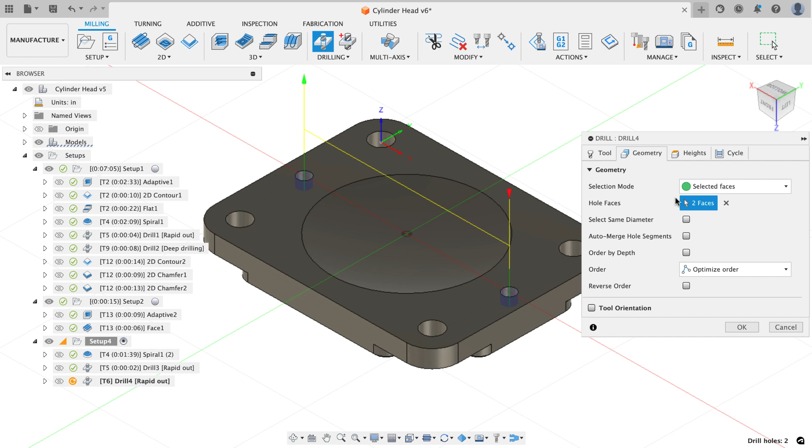I'll go select that tool out of my model engine project this time. There's tool number 6, the 1/8 inch drill, aluminum drilling as the preset. And I'm just going to click on my 2 hole faces that I want. And then on the heights tab, only change I need to do is drill tip through the bottom. We're only going 1/8 of an inch deep on this, so I'm not going to peck. I'm just going to go for it. And I'll hit OK.

Again, I want to look at this. So I plunge on the spot drill. I plunge here and retract here. And notice that now I'm plunging here and retracting there, so I don't need to change the order. The last thing I need to do is just chamfer the holes.

So from the 2D menu, I'm going to select 2D chamfer. I'll select a chamfer tool. I should have that in my document that I can grab, tool number 12. And I'm going to select that, grab my edges. So it's going to be the outside edge. And then I'll select the 4 holes, and I'll have that do that in a somewhat similar way. So I got the face instead of the hole, so I'm just gonna X off that last hole. There, we click on that, and that, I guess it's not bothering anyway.

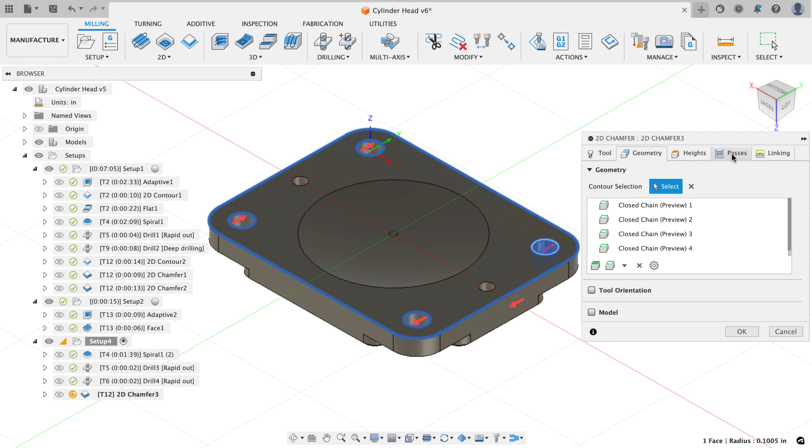And then I'm gonna go to the passes tab. Now what I don't want is I don't want to go too deep with this because I know I've got a vise jaw somewhere here. So I'm just gonna run with the defaults of 40 thou for a chamfer tip offset, and I'm gonna do a 0.01 edge break on here. My chamfer clearance is also going to be 0.01.

Nothing I really need to change on the linking tab unless I want to say, please lead in here first so I can watch it. And now I can hit OK. And I get the chamfer toolpaths that'll finish this part up. So with that, my part is completely cammed and I can start posting code and go set up on the machine. So come back on Saturday and we'll see how this part turns out with my machining techniques that I used here.